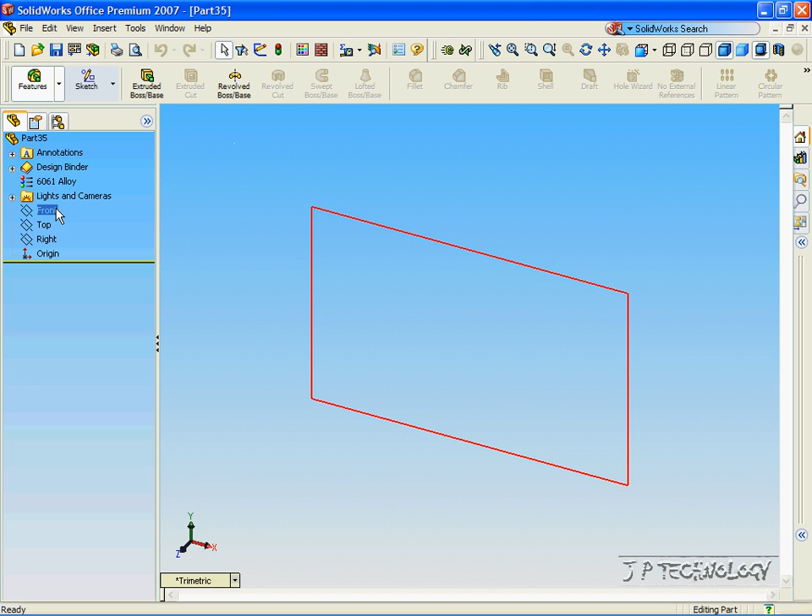To start off, click File, click New, click Part, click OK. Now we're first going to make a rectangle, so click Front, click Sketch, click Rectangle.

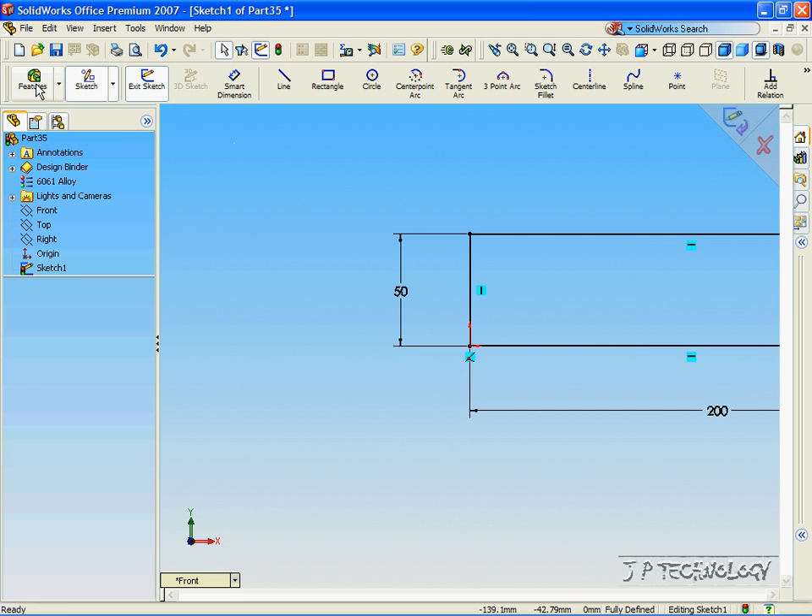Click the origin and a point outside of the origin. Let's dimension this rectangle at 50 by 200. Click OK. Now let's extrude this out by 20 millimeters.

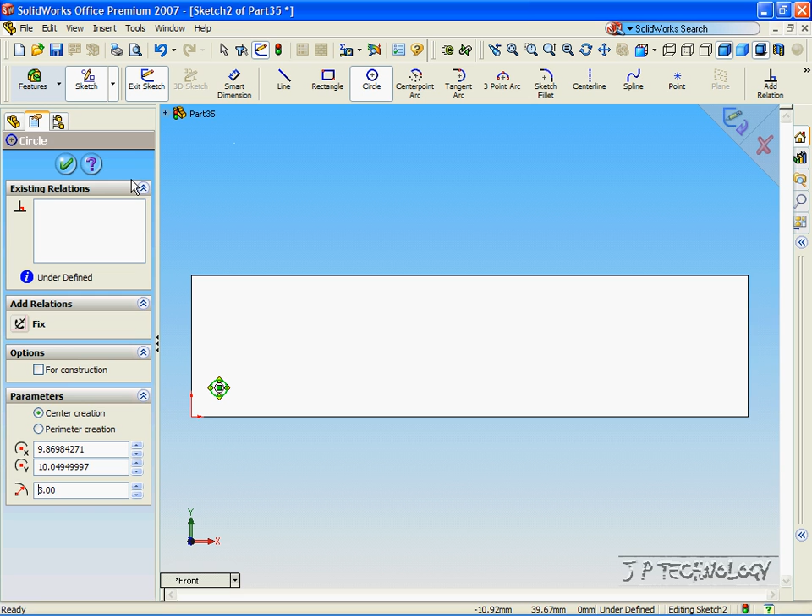Click OK. Now let's go to the front view and click the front face, and we'll sketch a circle on the front face with a 3 millimeter radius. Using the Smart Dimensioning tool, let's make it 10 millimeters away by 10 millimeters away.

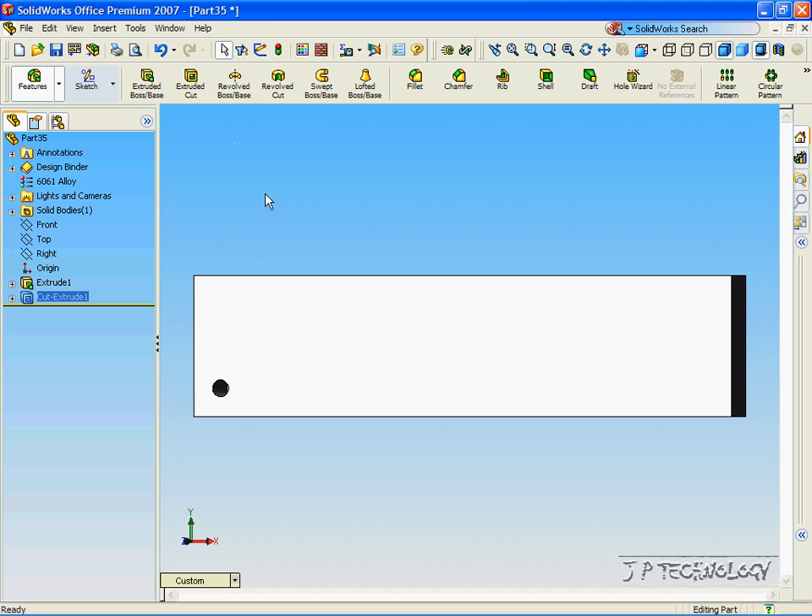Click OK. Now let's cut this circle out. Click Feature, click Cut, click Through All, click OK. So now we've made our feature that we're going to use with the linear pattern.

Now click Linear Pattern, and the first thing we have to decide is the direction we're going to make the linear pattern. The direction has to be a straight line, and right now we can either make it horizontal or vertical. For the first one, let's make it horizontal.

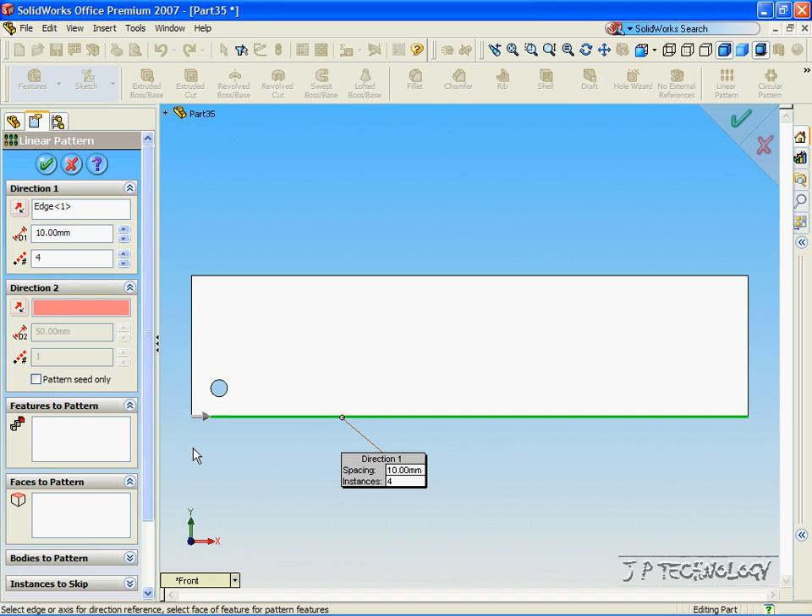Now click the Feature to Pattern, and we're going to select the circle. So let's go through our tree and click the Extrude Cut.

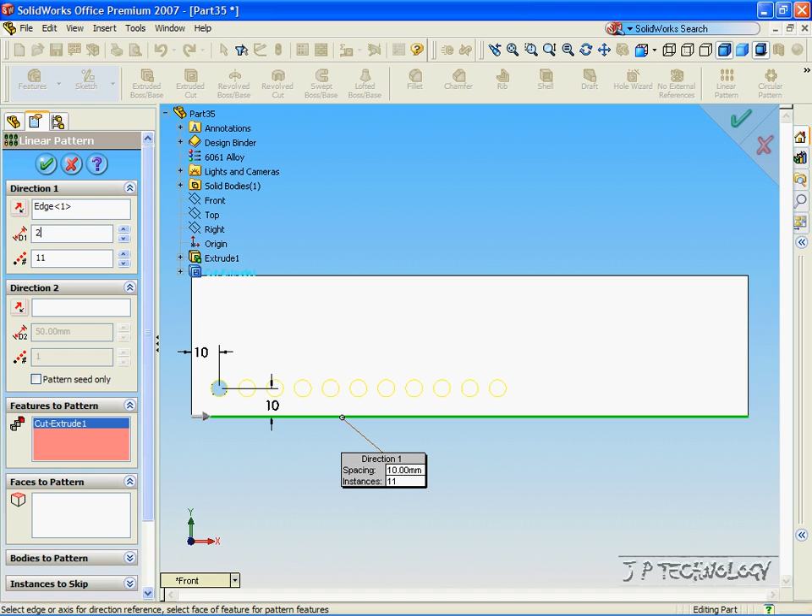Now we have other parameters to play with: the distance between each circle, and how many circles we're going to create. Let's make it 20 millimeters between each circle, and 11 circles. Click OK, and now we've made our linear pattern.

Now let's do the same, but make a vertical linear pattern. Click Linear Pattern, click the vertical line, click Features to Pattern, and click the first linear pattern that we made.

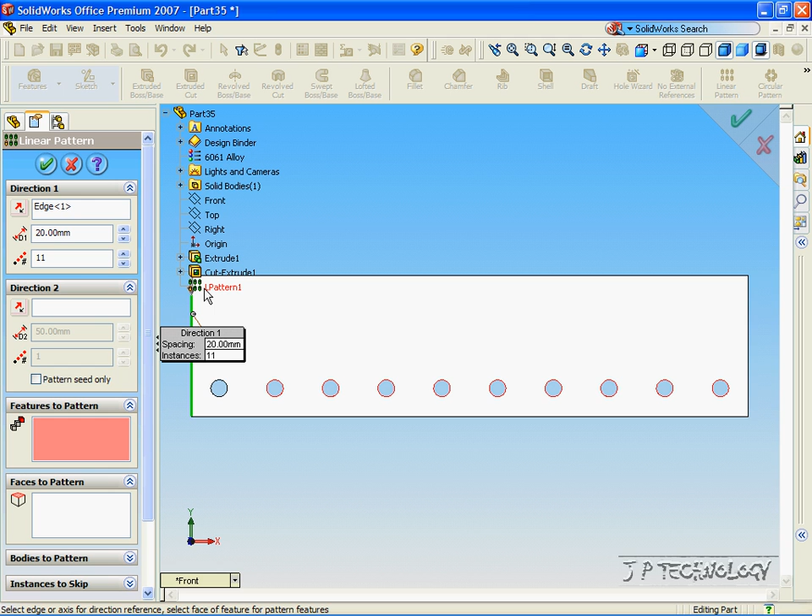Now as you can see, the linear pattern is going in the wrong direction, so click reverse direction to get it going the right way. Let's make it 10 millimeters away, with 4 sets. Click OK, and we've made our linear pattern again.

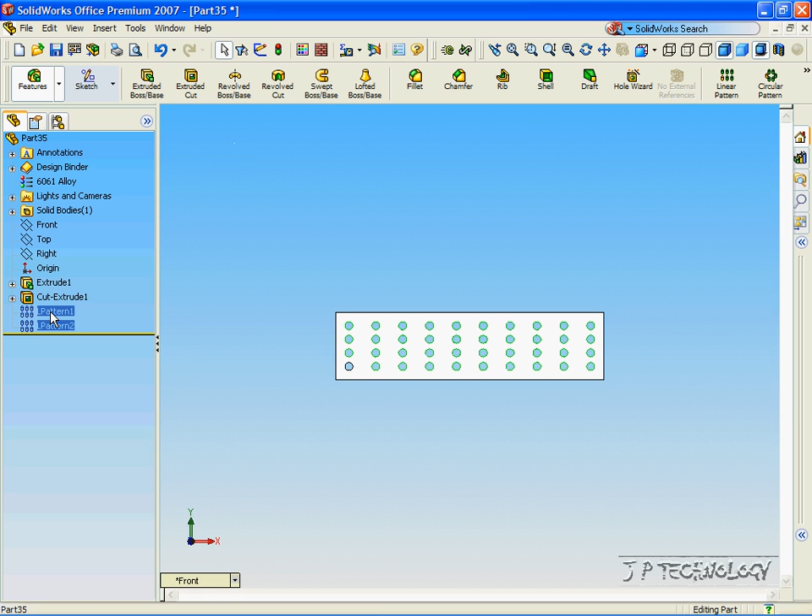Now click Linear Pattern 1, hold down Control, click Linear Pattern 2, right click, and let's suppress these two linear patterns.

Now I'm going to show you that you can make a linear pattern with a line that you put in yourself. So click on the front face, click Sketch, click the center line. Now click the point in the corner, and click along this line.

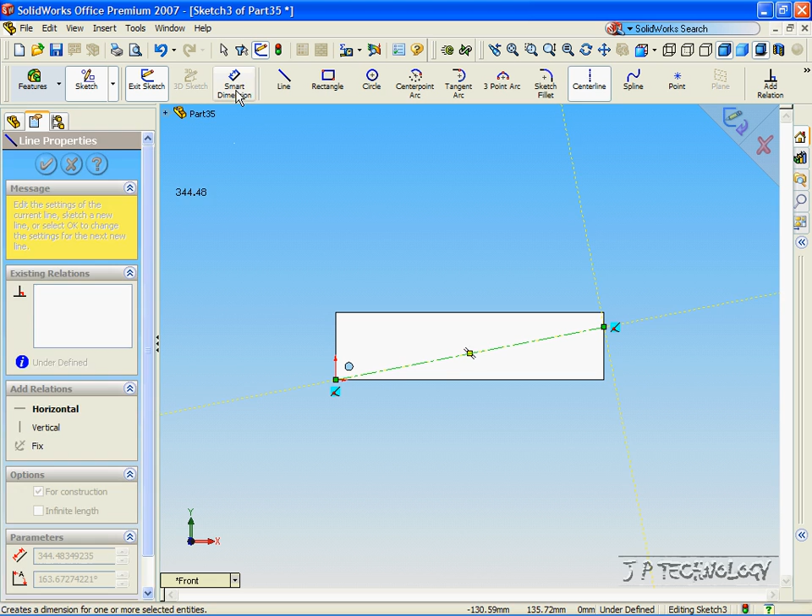With the Smart Dimensioning tool, we're able to either dimension the angle between the two, or dimension the distance between this point and this point. For this, let's do the angle. Click this line, and let's make the angle 5 degrees.

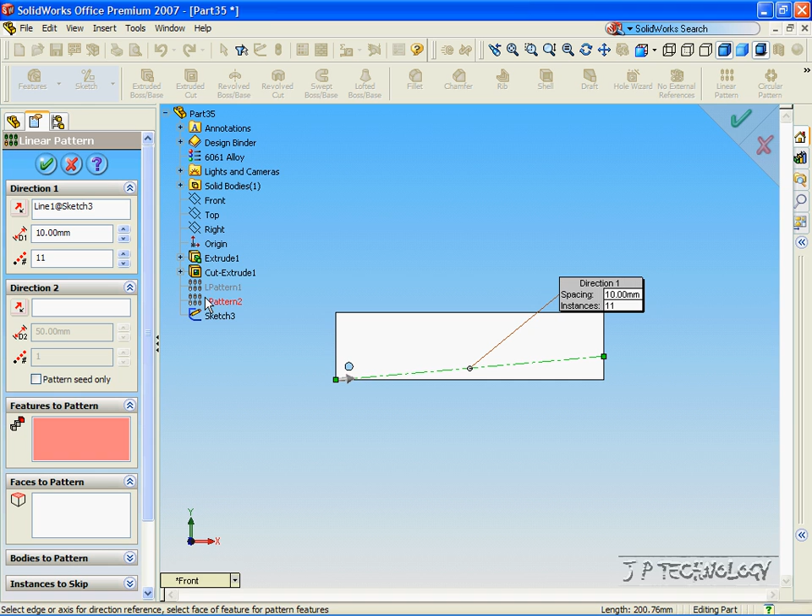Click OK. Now click Linear Pattern, click the line we just made, click Features to Pattern, open up the tree, and use the hole that we cut. Now let's make this 20 millimeters with 10 features. Click OK, and now we have it going on an angle.

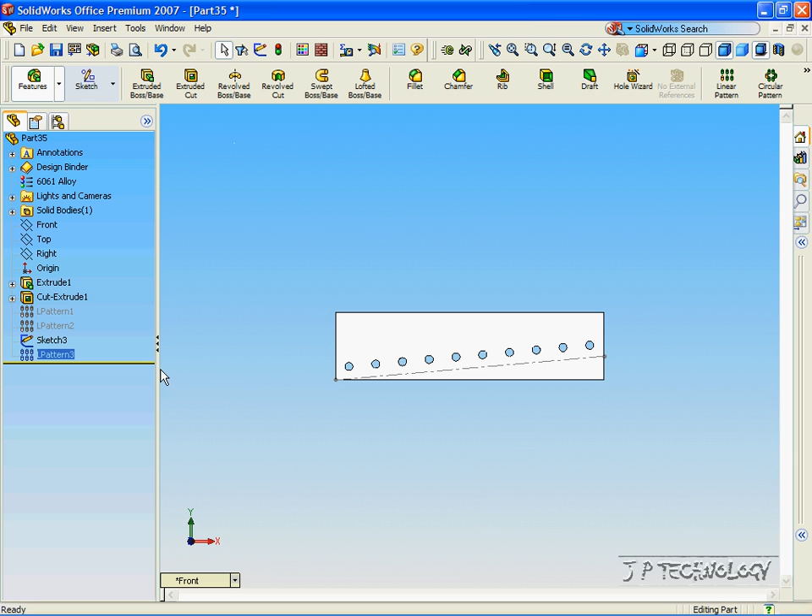Now we can also adjust this angle, and the linear pattern will follow it. So right click on the sketch, click Edit Sketch, and let's make this angle 20 degrees. Click OK, click Accept, and now the pattern goes off with those 20 degrees.

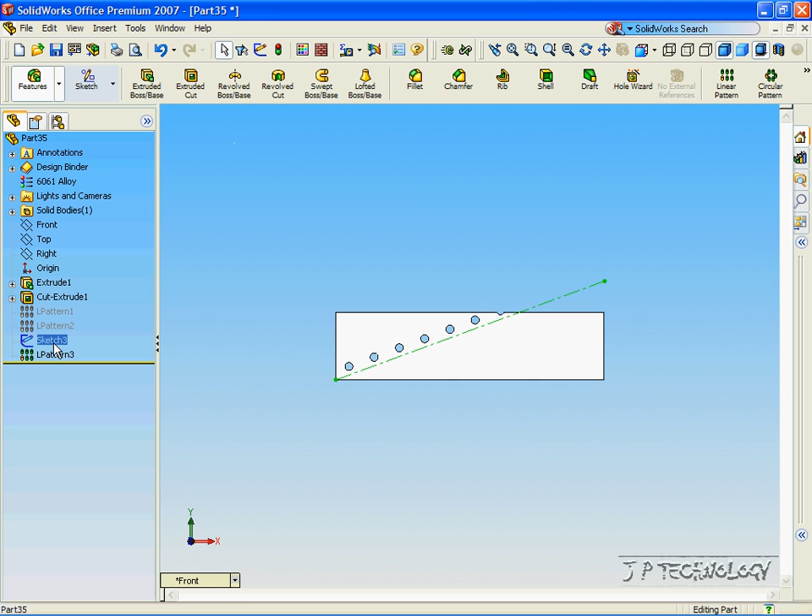Now click the sketch, hold Control, and click Linear Pattern 3. Now right click and delete both of them.

Now we're also able to change the initial extruded cut, and it will also influence the linear patterns that we have both suppressed. Let's open up the extrude cut, right click the sketch, click Edit Sketch, and zoom in.

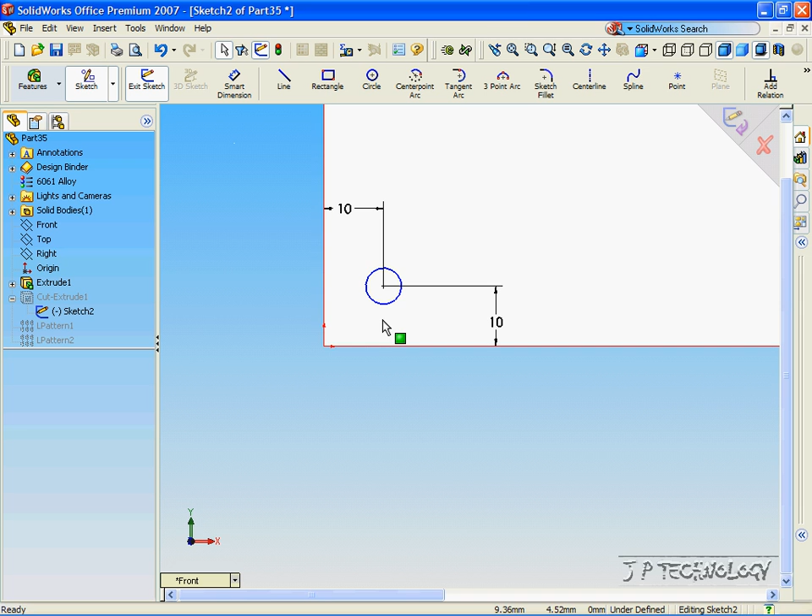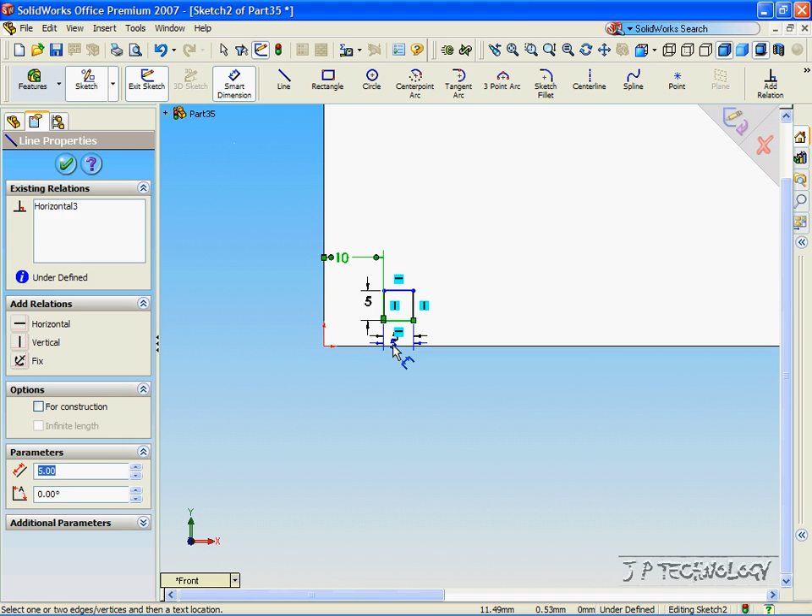Now let's delete this circle and make a square. We'll make this square 5 by 5, and we'll make it 10 millimeters away and 10 millimeters away. Click OK, click Accept.

Now when we unsuppress the two linear patterns, they will be squares. So click Linear Pattern 1, hold down Control, click Linear Pattern 2, right click and press unsuppress, and now our patterns are squares instead of circles.

And this concludes our tutorial on the linear pattern function within SolidWorks.